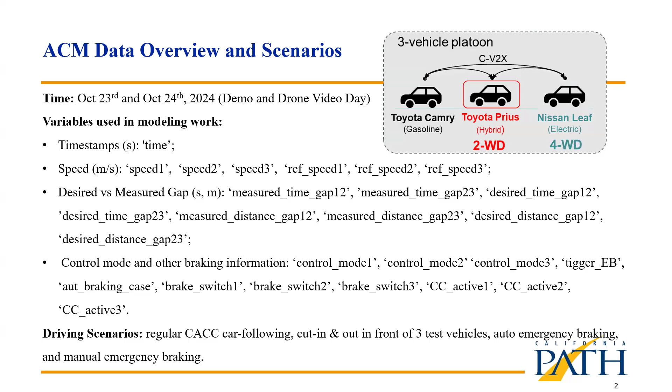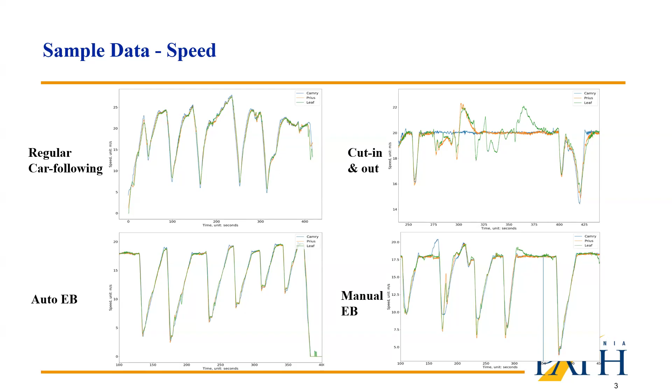This is the sample data we extracted from our data set, and these are the speed profiles. The top two are the regular car following and the cut-in cut-out scenarios. The bottom two are the emergency braking for automatic and manual emergency braking.

So to fully utilize those data, we need to develop the model for a microscopic simulation purpose. We first need to develop a CACC car following model framework. And this modeling framework can be implemented in microscopic simulation. In our project, we are using the simulation software Aimsun. So we basically need to create a bunch of different trigger conditions to determine whether this vehicle is gonna be under the normal cruise control mode or ACC mode or CACC mode.

And also under CACC mode, as I just mentioned in the last slide, we have 4 different categorized driving scenarios. So we need to determine which scenario this CACC vehicle is gonna be under based on the braking information and also the distance gap information with the preceding vehicle.

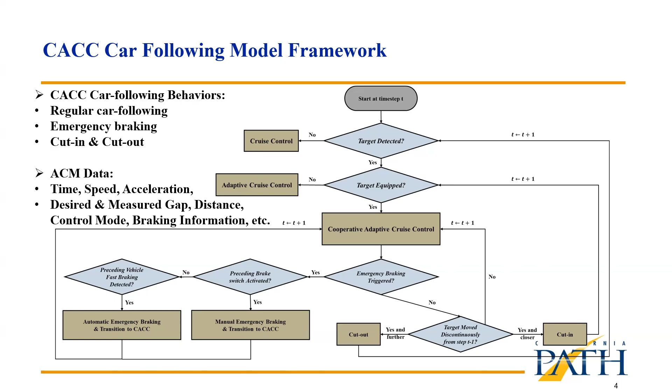But for emergency braking, the behaviors are gonna be quite different. So first we have different trigger conditions. Based on the speed or other information we can get from the data set, we need to first determine whether this vehicle should undergo emergency braking. If yes, then we take a different formula to calculate the reference speed of the subject vehicle. The other formulas, like how to calculate the gap error or apply the gap error correction, are just the same as I showed in the last slide. The main difference comes from how to calculate the reference speed of the subject vehicle.

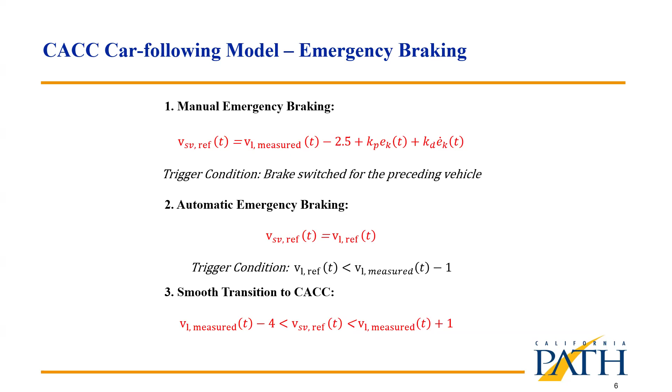And after we activate emergency braking and finish it, we need to apply a smoothing transition, basically to give a boundary of the reference speed to these CACC vehicles to make sure that the vehicle will not take very aggressive or too conservative behaviors, so that it can smoothly transition back to regular car following after the emergency braking has finished. So this is when I fit the model I just proposed to the data we collected at ACM.

Because the Camry is always the leading vehicle, Prius is the second, and Leaf is the third, we need different optimal parameters fit to both the second and third vehicle. We can see that the parameters are different, as well as the root mean square error between the simulated speed profiles and the observed speed profiles. The smaller this error is, the better the model performance. In regular car following, both errors are controlled under 0.2, and the second vehicle has a smaller root mean square error compared to the third vehicle.

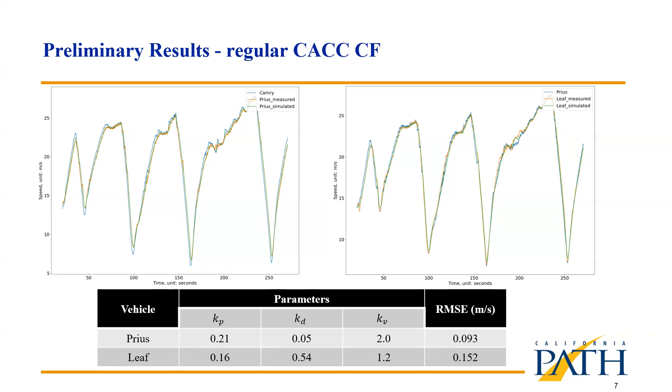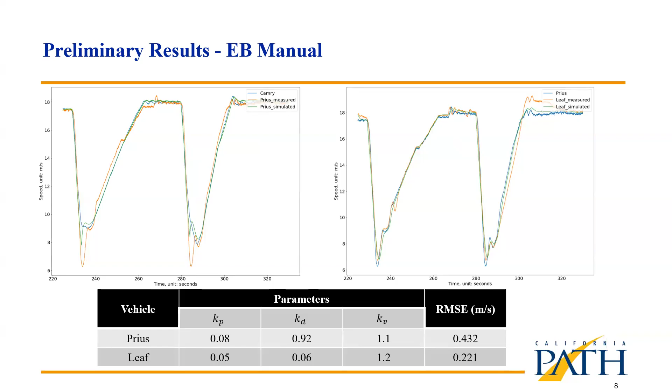So this is the manual emergency braking case. We have separate parameter sets to fit the data, because under manual emergency braking there's a dramatic overreaction, especially for the second vehicle, the Prius, because it needs to take such a conservative and overreacted reaction to avoid the collision. And the root mean square error for the model obviously increases compared to the regular case.

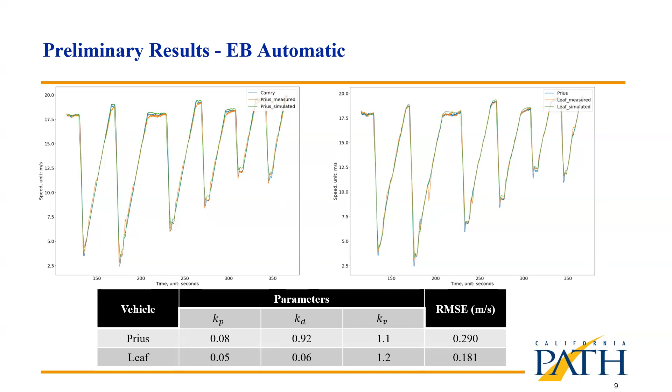For automatic emergency braking, the subject vehicle can still get access to the reference speed of the leading vehicle. In this case, while the parameters stay the same, the fitting performance becomes much better compared to the manual case, and the root mean square error becomes much smaller.

For the cut-in and cut-out scenarios, first we need to finish the recalibration of the regular car following, then have the smoothing functions from emergency braking to regular car following, and then we separate the cut-in, cut-out maneuvers into 3 continuous modes: before lane change, which is the preparation stage, then during the lane change, which is receiving lane change car following, and then after lane change. That's what I call BCF, RCF, and ACF modes. So we have a trigger condition here.

Basically, it means that if the subject vehicle has a dramatic change of the distance gap with the preceding vehicle, it means that the following object changes within a short amount of time. That means cut-in or cut-out maneuvers happen. And then based on whether this difference in terms of the distance gap has a positive sign or a negative sign, we can determine whether it's a cut-in or cut-out.

So for cut-in, to avoid any too strong or aggressive behaviors at the very beginning, we apply a 2 second open loop phase, which means that it could apply a very conservative car following behavior to avoid any potential risk of collision, and then followed by a dynamic target speed constraint for the next 2 phases.

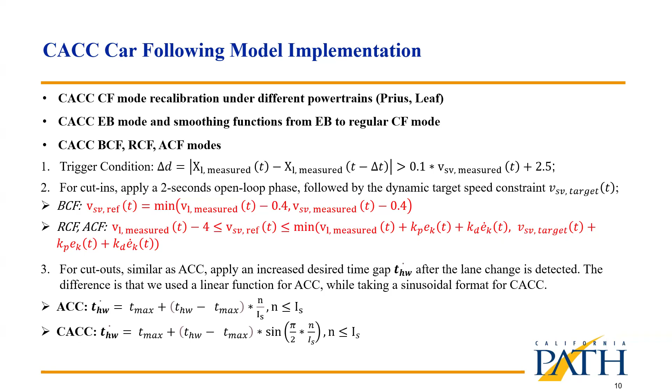And for cut-outs, we're going to apply a very similar strategy as we applied to our previous ACC mode, which is to increase the desired time gap after the lane change is detected. So the car will not automatically have such a strong acceleration to catch up with the preceding vehicle, because with the cut-out, the distance gap is going to dramatically increase. So we're going to apply a dynamic desired time gap first to avoid any too strong and aggressive acceleration.

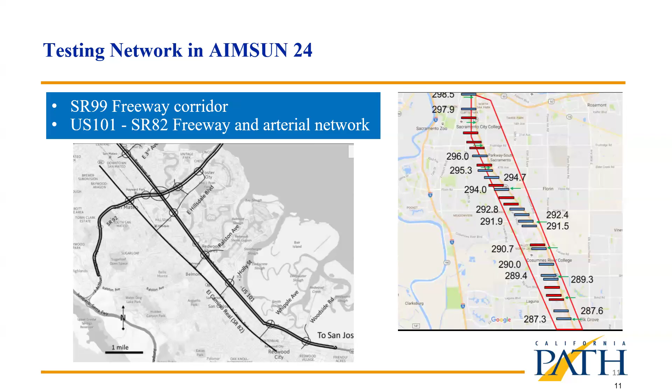So after we implement all these models, as well as the smoothing algorithms, into our micro SDK codes written in C++ in Aimsun, we're going to test those models' performance in the latest Aimsun 24. The 2 networks that we are using include, first, only a freeway corridor, just the highway SR99, and the second is the US 101 SR82 freeway and arterial network, including both an 8.5 mile long freeway and parallel arterials connecting with each other.

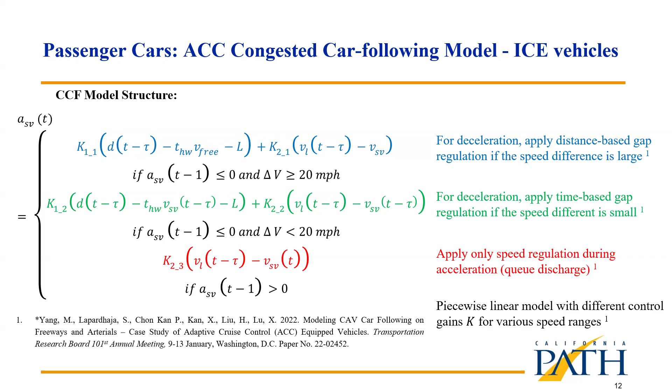Just for your interest, this is not the focus of this project, but it's also part of my previous PhD dissertation. We developed some other ACC car following models before, and those models have been published in some conference papers and journal articles. If you are interested, you can always easily get access online. But here I just quickly go over these ACC models, because if we want to test and evaluate the CACC performance that we just developed in this project, we also need pretty accurate and reliable ACC models. And these are the ACC models I developed previously.

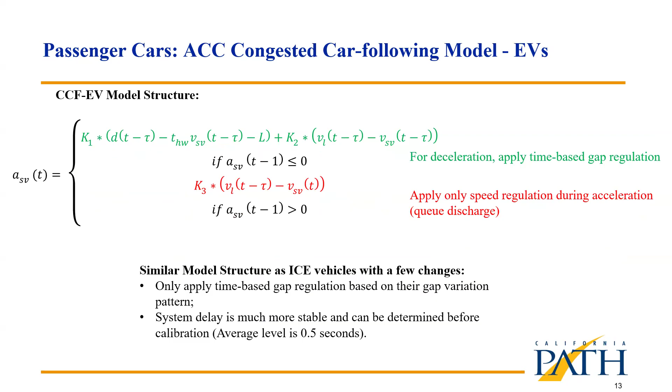So it also needs separate models for the different driving scenarios, and also for different powertrains, like ICE engine vehicles and EVs, which have quite different car following behaviors that need separate models to capture. And also when it comes to cut-ins and cut-outs, it has separate models to respond to those maneuvers.

All right, let's jump to our simulation results with all those ACC and CACC models on the different powertrains. First, I didn't add the CACC vehicles, just ACC vehicles with different powertrains. We gradually and incrementally increase the market penetration of electric vehicles paired with ACC. So first, we tested 100% ICE engine vehicles activated with ACC, then gradually increased the market penetration of EVs, and eventually got 100% electric vehicles paired with ACC, and we look at the total travel distance, the speed, the queue discharge speed, the average headway, those very classic and representative traffic performance metrics.

And the results from the simulation show that if we transfer from all ICE engine vehicles to electric vehicles while activating ACC the whole time, the discharge flow and the total travel distance are going to increase by over 20% respectively, while the average headway downstream of the major bottleneck on this freeway corridor is going to decrease by about 18%, which is quite consistent with our field observations of those two powertrains paired with ACC.

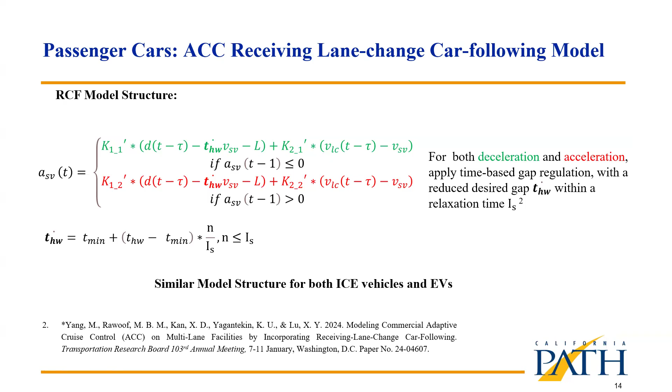Oh, yeah, sorry, I need to clarify that. So for ACC, it does not include emergency braking, because if you have emergency braking, it basically just switches back to manual driving mode. It just behaves like a human driven vehicle. And for cut-in and cut-out, we have how the ACC handles cut-in and cut-out in our models. So my question remains though, what is the state of the art in the literature before you started to design CACC for cut-in, cut-out, and emergency braking?

Are there articles in this already, or is this completely new? Nobody's studied this before. It's quite new. It's very new. So there was some research that analyzed the cut-ins and cut-outs for human-driven vehicles, but for ACC and CACC, most of the researchers just stick with the regular car-following without any lateral movements. Basically, in a platoon, each vehicle just follows another one, and they analyze the longitudinal control without any lateral movement. So it's quite new.

But I followed some ideas from the studies of lane change behaviors for human-driven vehicles, and we borrowed some of the ideas, and then also created some new ideas to integrate them together for ACC and CACC. Cool. Yeah, please highlight those particular things. Okay. All right. Yeah, thank you.

I think you're talking about traffic simulation. So in traffic simulation previously, cut-in and emergency braking were rarely considered for ACC or CACC models. But Scott, I think your question is more related to vehicle control design. And for vehicle control design, of course, ACC and CACC traditionally consider cut-in. They have to consider cut-in, cut-out, and emergency braking.

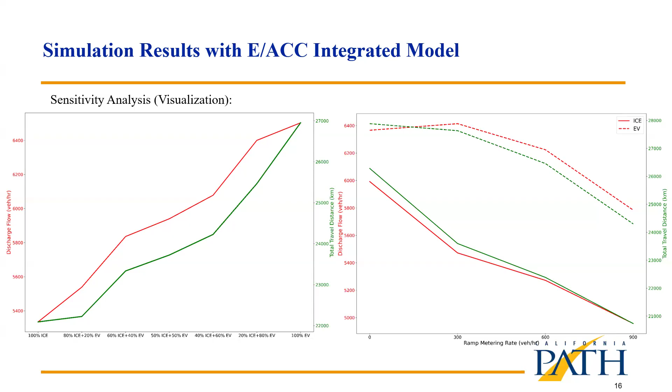But electric vehicles actually have consistent power. So even at very low speed, they won't have much lower power compared to high-speed scenarios. Given that consistent power, they can have a stronger and faster response to the preceding vehicle, so the gap between the subject vehicle and the preceding vehicle can be much shorter compared to ICE vehicles. Basically, EVs can easily catch up with the preceding vehicle, even under very large speed fluctuations.

All right, so after analyzing some basic properties of ICE vehicles and EVs paired with ACC, we add CACC vehicles into consideration. The first column is the market penetration of CACC, and once we determine the market penetration of CACC vehicles, the remaining market penetration is shared between electric vehicles paired with ACC and ICE vehicles paired with ACC.

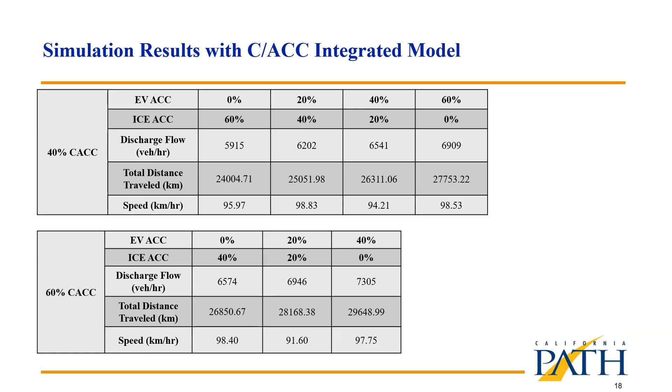And these tables are just similar to the table I showed in the last few slides, comparing the traffic performance of those different market penetrations. So the CACC increased from 0% to 100%.

The general conclusion is that as the market penetration of CACC increased, the road capacity can increase by up to 43% compared to the ACC-equipped combustion-based vehicles, and by up to 14% compared to the ACC-equipped electric vehicles. And the 80% CACC and the 20% electric vehicles paired with ACC could have a pretty similar performance to 100% CACC, indicating the EV capability to catch up with the faster response tuned vehicles.

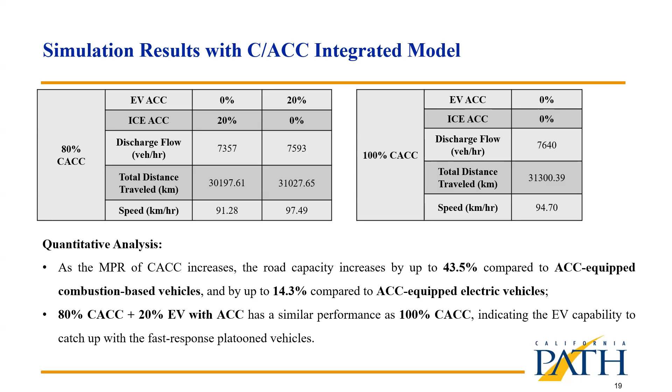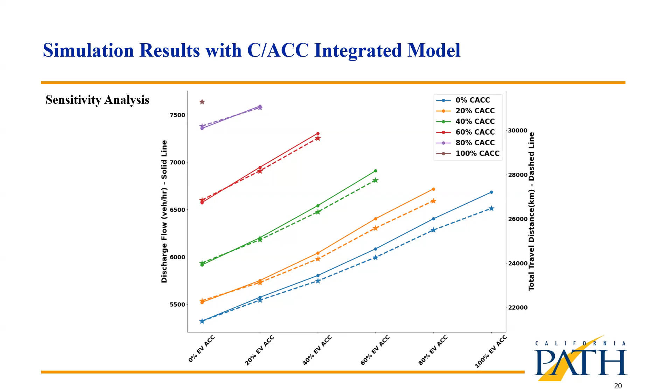And this is just a graphical way to show all those numbers listed in those tables. So the x-axis represents the market penetration of the EV increasing, and different colors represent the different market penetration of CACC. And you can see basically more EV paired with ACC and more CACC could bring a better traffic performance on both the freeway corridor and at a network level.

And then after we conducted all those preliminary sensitivity analyses on the traffic side, I also would like to introduce a little bit about our co-simulation works in this project. So basically, previously we assumed that all the CACC vehicles can communicate with all the other CACC vehicles without any communication failure, which means that they can always get access to all the other CACC vehicles' information during the whole simulation. However, that's not the real case.

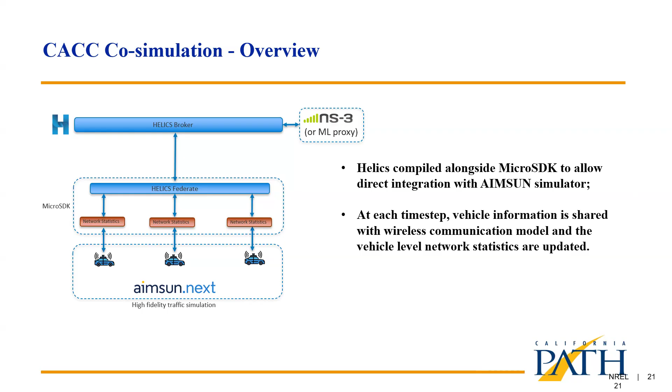So our cooperation team from NREL developed a V2X communication model. Basically, they tell us that each CACC vehicle has a particular probability of failing to communicate with other CACC vehicles. And if this situation happens, this car cannot communicate and it will switch from CACC mode to a normal ACC mode, and the performance will become worse. That's also a key component of this project.

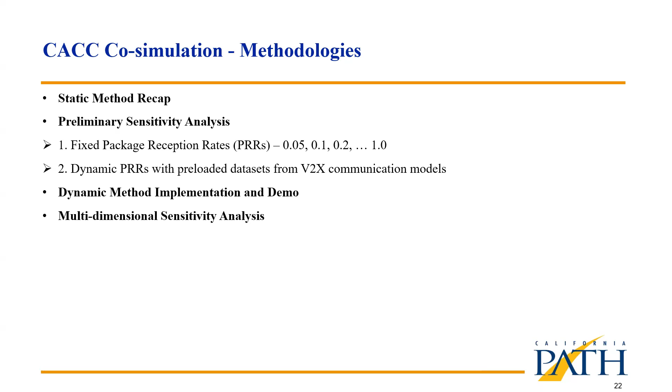However, the dynamic method gets updated at every simulation step. At every simulation step, we get every simulated vehicle's coordinates and pass them to the V2X communication models. The V2X communication models output packet reception rates, and we utilize those packet reception rates to determine at this particular time step whether each vehicle can receive the message successfully or not. Based on this condition, we determine whether each vehicle maintains CACC mode or goes back to ACC mode.

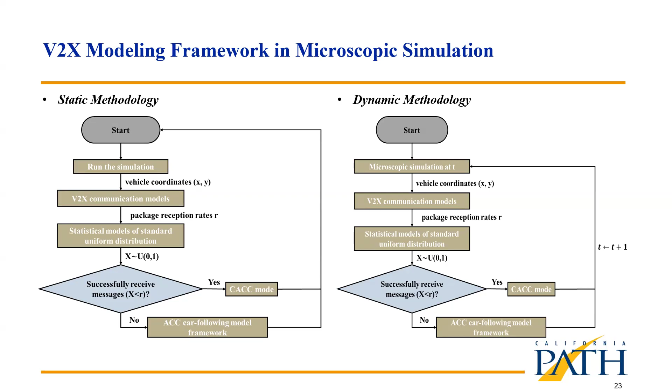And is that experimentally collected in the field, or is this just simulated? These are simulated. Our collaborator, the NREL team, developed neural network-based communication models on their side, and we just directly apply their communication models in our simulation and tested their performance under different traffic demands.

Are we assuming each connected vehicle can potentially connect to every other connected vehicle? So it's like a 1-to-N? Yes. Okay. And so there's this Bernoulli distribution for the pairwise connection between vehicle I and vehicle J, or is it vehicle I and all other vehicles? All the other vehicles. Okay, so if it's beyond the threshold, then it can't communicate with any vehicles? Yes, that's correct. Then it will switch back to ACC.

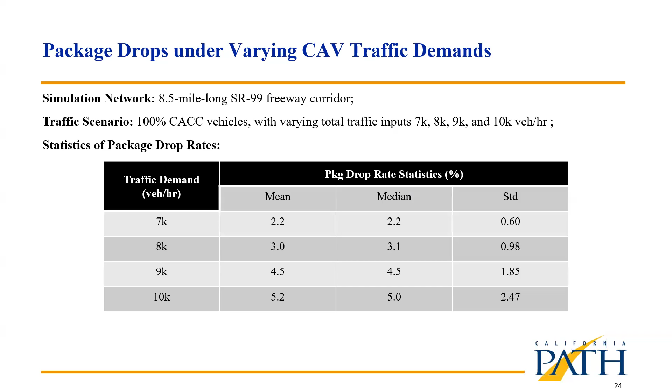I see, okay. Yeah, basically that's the distribution of those package drops under the different CACC traffic demands, and it just gradually moves from a center at 2% to 5% while the travel demand increases.

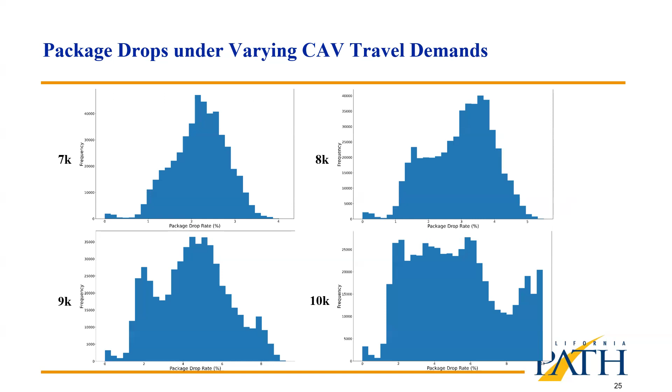And the first sensitivity analysis, while adding those V2X communication models: their model can only generate a relatively small package drop rate, like from 2% to 5%. Even under very heavy traffic, their models can only generate about 5% package drops. But I'm just curious, what if I manually put in an incredibly large package drop rate, then how will the performance look?

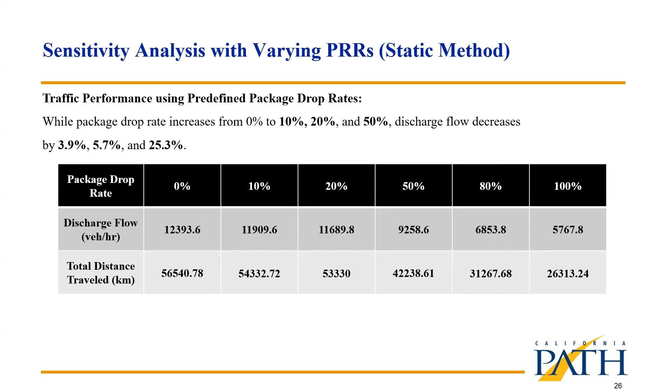I manually increase the package drop from 0% to even 100%, and that's the traffic performance. You can see that the traffic performance decreases dramatically when the package drop rates go beyond 20%. So basically it means that on average, if over 20% of the CACC vehicles cannot communicate with other vehicles, then the traffic performance will go really bad. But if it's maintained around 5% or 10%, the performance is still very promising.

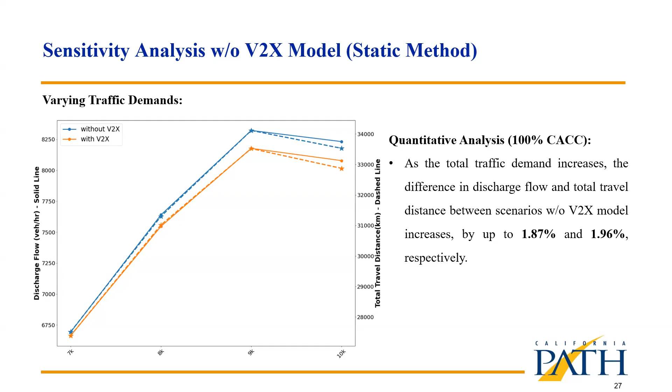However, if we increase the market penetration of CACC from 0% to 100%, then the difference becomes maximal when the CACC market penetration is about 60%. The discharge flow and the total travel distance decrease a little bit over 2%. But still, the difference is not that huge. But again, it's a static method, so it's not accurate.

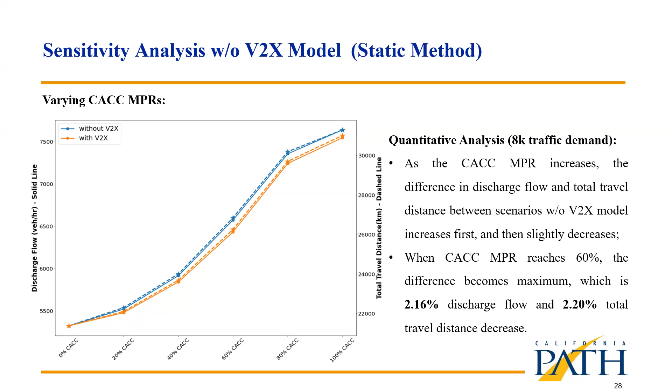We're eventually gonna move to our dynamic method, which is to literally update and run their communication model at every simulation step. So we need to initialize the HELICS once at the beginning of the simulation, and this HELICS is kind of like a connector between their communication models and our driving behavior models.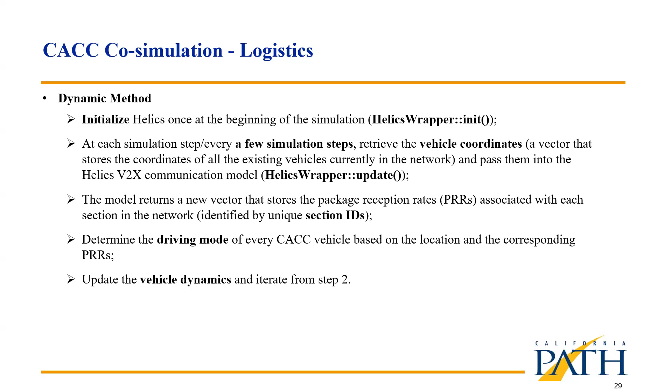So at each simulation step, we're gonna retrieve the vehicle coordinates and pass those coordinates into their communication model, and then the model returns a vector that stores the packet reception rates associated with each section in the network. Then we determine the driving mode of each CACC vehicle based on the location and the corresponding packet reception rate. And then we iteratively update the vehicle dynamics and repeat from step 2 to step 4.

And these are the potential future sensitivity analyses we're gonna conduct. Alongside the classic traffic side, which is to increase or decrease the travel demand and play around with the market penetration of different types of CVs, we also need to consider the communication range. For example, the communication range right now is set at 100 meters; what if the communication range of the CACC vehicles is larger, 200 meters or even 1,000 meters? Then with those V2X communication models activated, how does this affect the traffic performance differently?

And we also have two other professional parameters we can play with, which are the probability of resource reselection and the resource reservation period. Those are very professional parameters related to the communication models.

Is communication delay another issue that you consider? The communication delay is actually directly included in our car following behavior models. For their communication models, we directly get their outputs without any delay. But when we run our car following models, it actually has the communication delays.

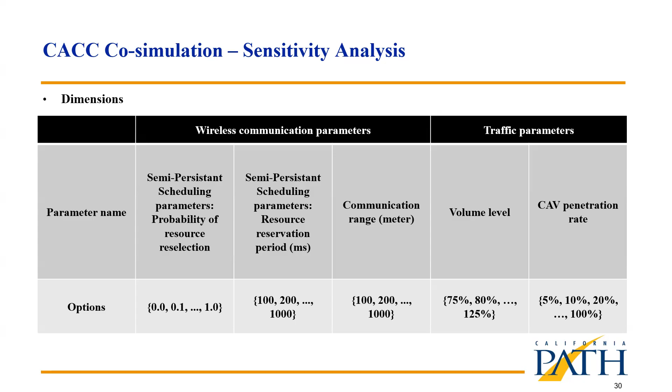And also the switch between the CACC and the ACC logic could also be reconsidered in more detail. For example, whether we need to immediately switch back to ACC when the communication drops, or if the communication has a continuous drop for over 1.5 or 2 seconds or 10 simulation steps, then we switch back to ACC.

The second thing we need to do is, of course, to further add those cut-ins and cut-outs and also the emergency braking modules into consideration and have a comparative analysis with our previous CACC model to see what kind of difference the new model could bring to the traffic performance evaluation.

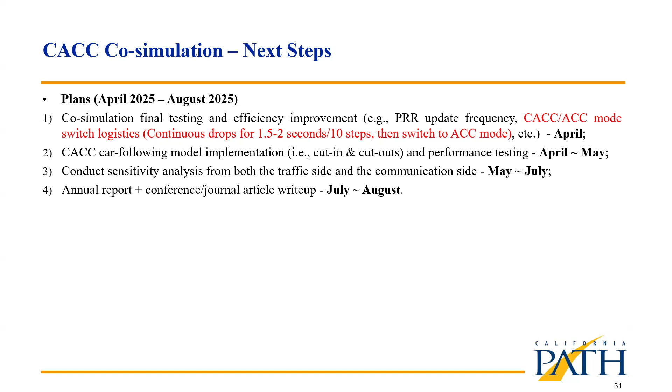And then the third step is, like what I showed in the last slide, to conduct sensitivity analysis, not only from the traffic side, like the travel demands or the market penetration of different CVs, but also from the communication side, how we play with the communication range and other communication-related parameters. And then it's just about the annual report and some conference and journal article write-ups.

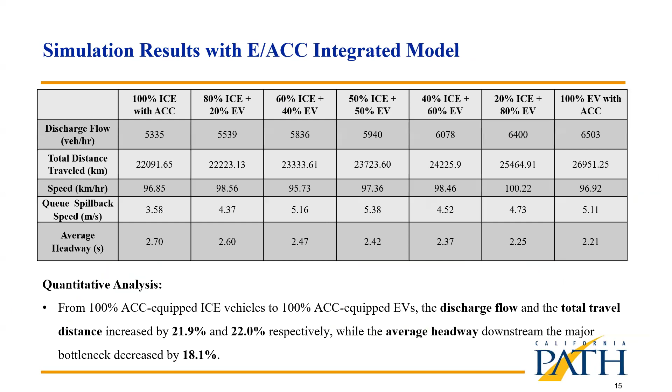So for the car following models, sorry, I'm stretching back a little bit, can you describe how you created the CACC model and how that relates to the Aimsun model? Aimsun is based on the Gipps model, correct? So the CACC, is that something you developed totally on your own, or built off of the Aimsun models? No, this CACC model was actually developed on our own. Okay, perfect, that's what I thought.

So then that gets to my second question. I'm curious if you looked at potential heterogeneity in different CACC models, especially looking towards the possibility that OEMs are going to have their own proprietary models we don't have access to. If the OEMs get involved, you're likely going to have a bunch of different, hopefully interoperable, but still distinct CACC car following models. Do you understand where I'm getting at?

Yes, I totally get it. So you are saying the CACC models could be quite different. Yeah, I'm curious if you had any insight into what the impacts of heterogeneity in the CACC models will be. Yes, that's a very good question.

So basically, that's why we have those field tests first, and then we try to develop a model to fit our field data as close as possible. The field data proves that our CACC controller actually works and it can run safely under a bunch of different driving scenarios. So it's one CACC controller that is proven to work in the real world, and our model is just trying to fit that data as close as possible.